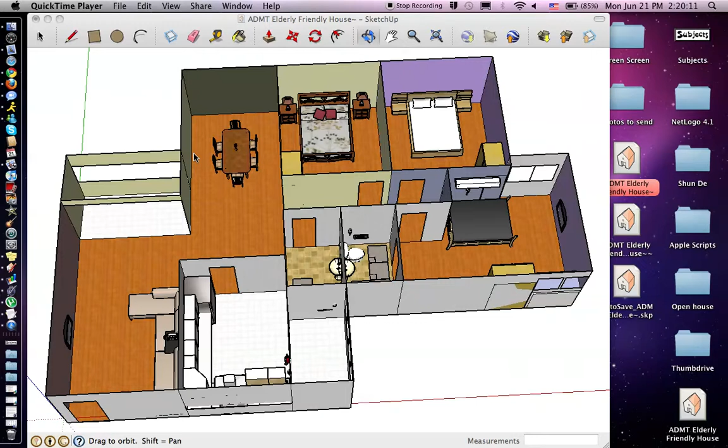This is my elderly friendly house which I've designed. Over here there is the living room where the TV has been set at a very low level, as you can see.

The sofa is also at a height of less than 1 meter so that the elderly can sit down and not have any problems or trouble when doing so.

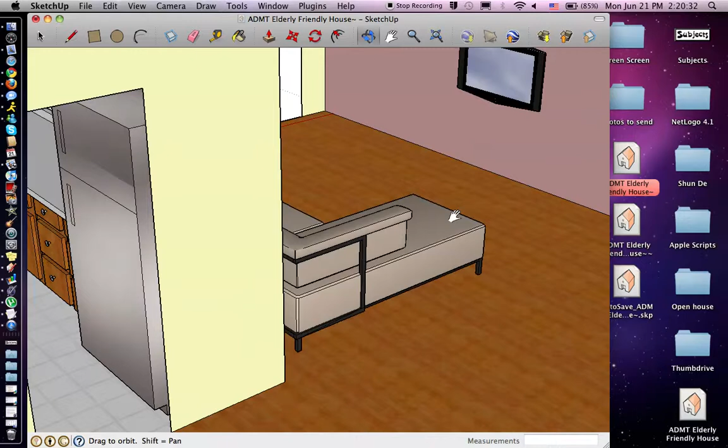Then we have the kitchen over here, which has been designed for safety as well. There is a fire extinguisher and phone in case the elderly has any trouble. She can call, and if there's a fire, then they can put out the fire.

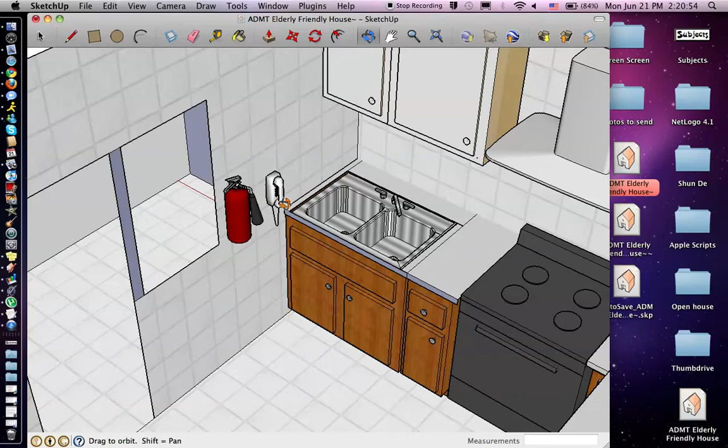The stove and the sink and the tabletop platform over here has also been set to a very low height of about 1 meter so that even in a wheelchair the elderly will not have any trouble cooking or washing up.

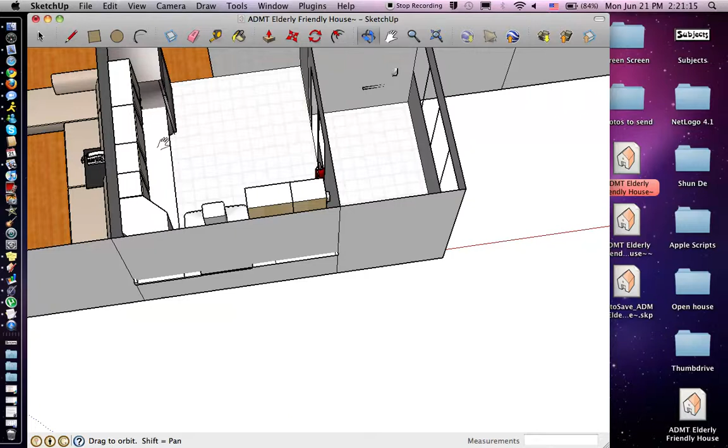Then we have the dining area where the dining table is at a height of less than 1 meter as well, as you can see over here.

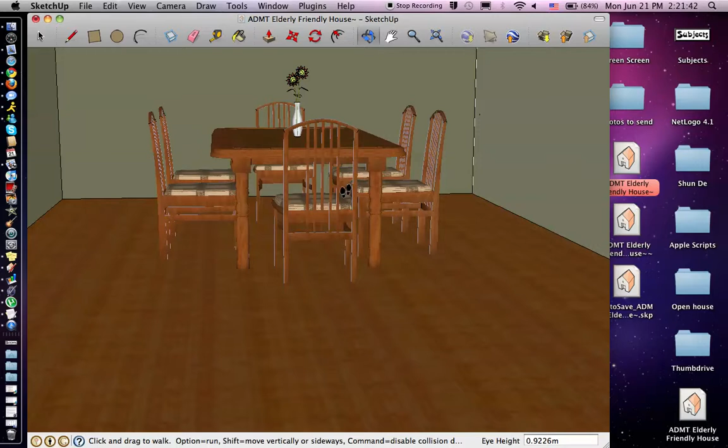Let me just change the mode. So as you can see, it's about 1 meter only.

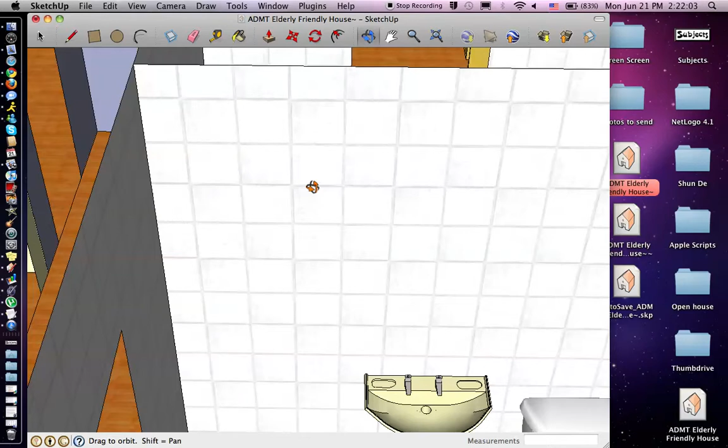Then we go to the master bedroom, where the elderly will sleep and such. Over here, as you can see, this is the elderly's bed.

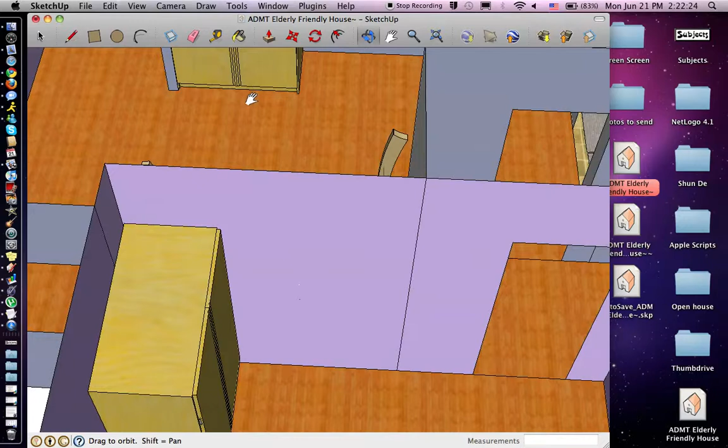There's a phone installed here, and a lamp has also been kept over there. Also, a TV has been kept for the elderly's entertainment. There is a table at also about a height of 1 meter, and a wardrobe for the elderly as well.

Then we also have the master bedroom's toilet connected so the elderly can access it at night or any other time of the day. It has non-slip mats. There are more in the master bedroom as that's where the elderly is most likely going to go to the toilet.

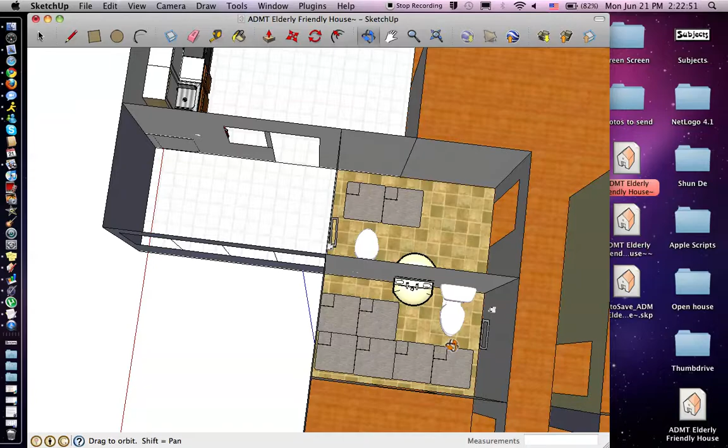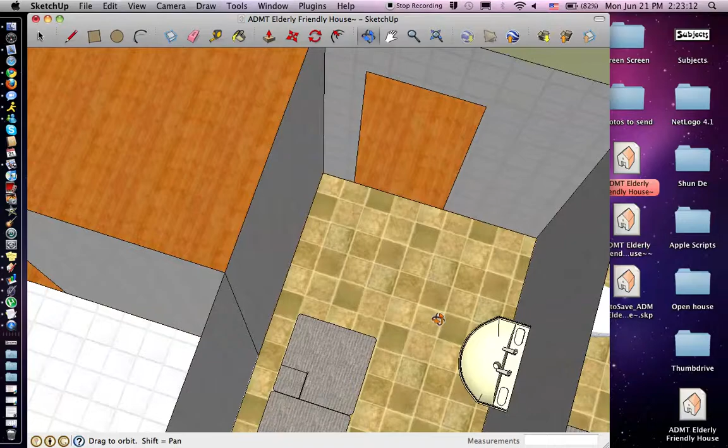A handle has been installed as well as a phone, so the elderly can have support, and if anything happens in the toilet, the elderly can call as well. As compared to the other bathroom, there are only 2 non-slip mats near the toilet bowl, but the elderly's bathroom will have more non-slip mats.

And then last but not least, we have the guest bedrooms, or whatever else it's called, with 2 lampshades at the side, and if the elderly has to come in, there's plenty of room for maneuvering. The wardrobes are here, and both have a nightstand.

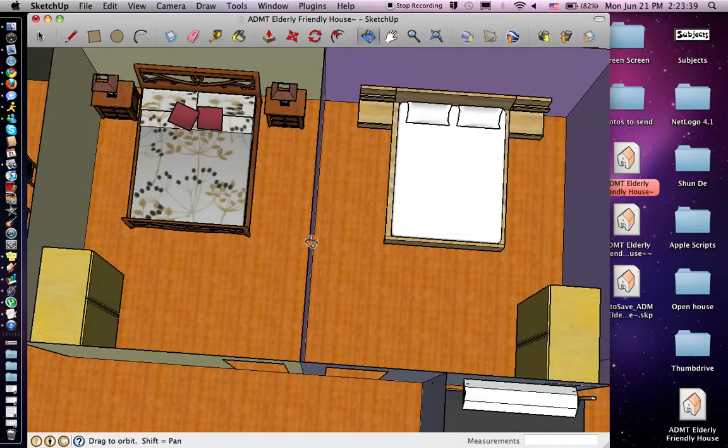And also the corridor for the elderly to move in a wheelchair, there's a lot of space as it's about 1.5 meters. So no matter what, this house is definitely very friendly for the elderly.